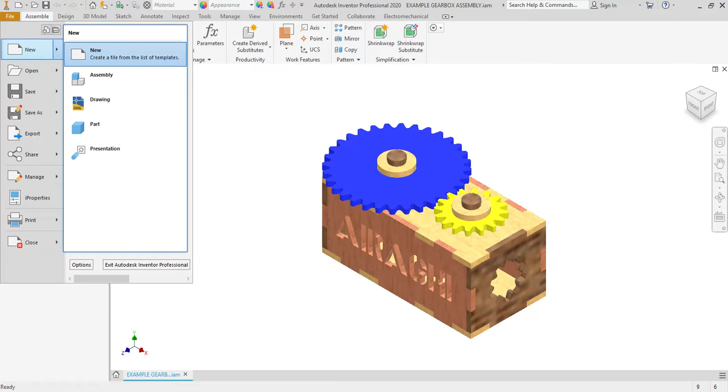So what you're going to do is come up here, go to New, and go to Drawing.

The first thing we want to do is set this to the correct sheet size. So we're right clicking on this, going down to Edit Sheet, and I'm going to change this to A size paper.

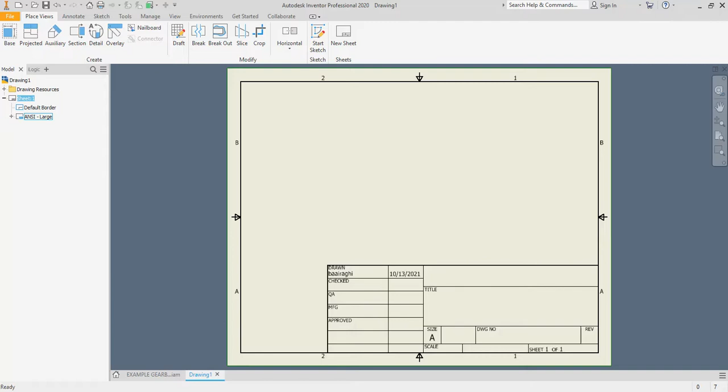Now this title block thing here, we're going to get rid of that. We're going to right click on ANSI large and delete that object.

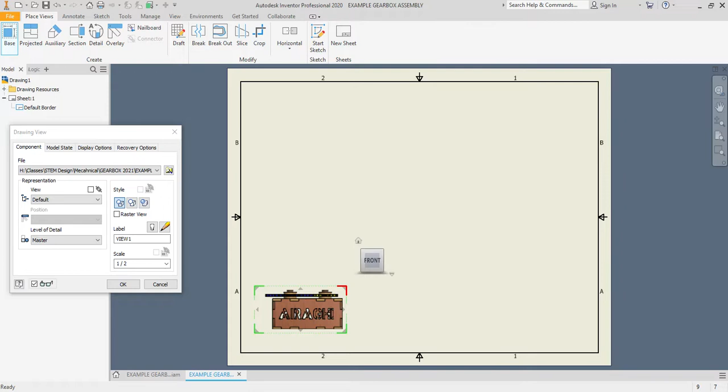So this is where we're going to put our 3-view drawing. We're going to start with our base up here, and if it doesn't show up, you need to go in and find your saved file, but it has to be a saved file for you to do this. You want this to take up as much of the paper as possible, so for me, I'm going to double the size of this.

What you do is click on the top here and the side over here, and you'll see your object. Then we're going to go up here, and this gives us an isometric drawing.

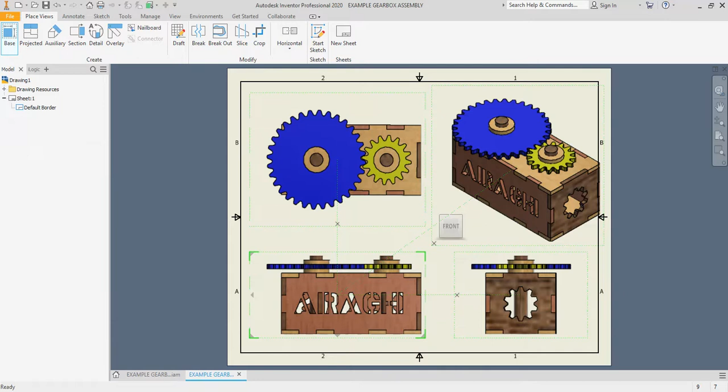So I can scoot the isometric drawing around, I can change the scale of it, I can double click and change the scale if I want. Let's say I want it like 0.9 instead of, or 0.75 for my drawing up here, something like that. You can change the scales of these so they fit better.

But what I want is for you to click on this button here, this shaded, and then hit OK, and then it looks like this.

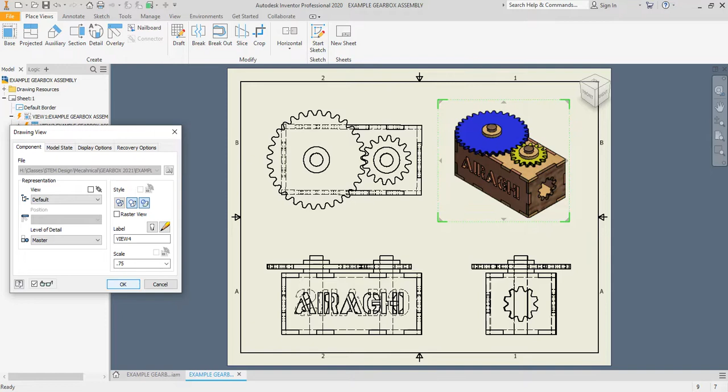So you've got hidden views here, and if you want, you can turn off the hidden lines here because this is pretty busy, and it kind of makes it look a little bit better.

I'm not really, what I'm looking for is to show the shape and the size of this so you can measure it. So we're going to go to Annotate, and we want a couple things here.

I want you to show me the distance between these, and I want you to show me the overall width of the object. Now you can't really see it here because of the gear, so I'm going to go from here to here to show you. There's my width, 4 inches, and my height here is...

I did mine 1.75 high. You can adjust your box however you want. You can see it here, 2. It might be better to do that 2 up here because it's a little bit easier to see. Since you have it 2 here, you don't need it down here.

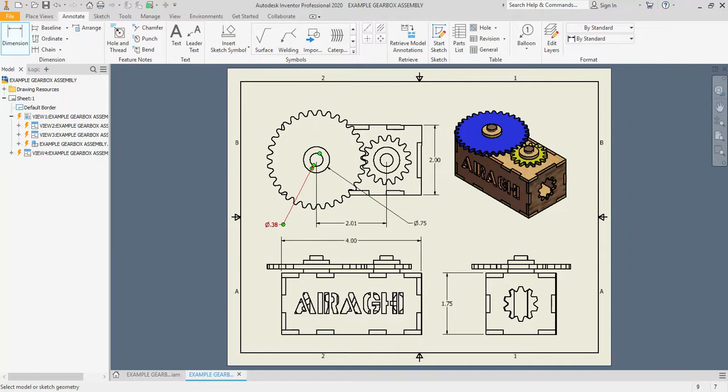As far as dimensions go, that's really all I need. Maybe a diameter here to show that this is 3/8 of an inch, and a diameter here showing that that's 0.75 inches. This actually is 0.38 because it's the actual compression ring which goes around here, and that's actually a larger diameter.

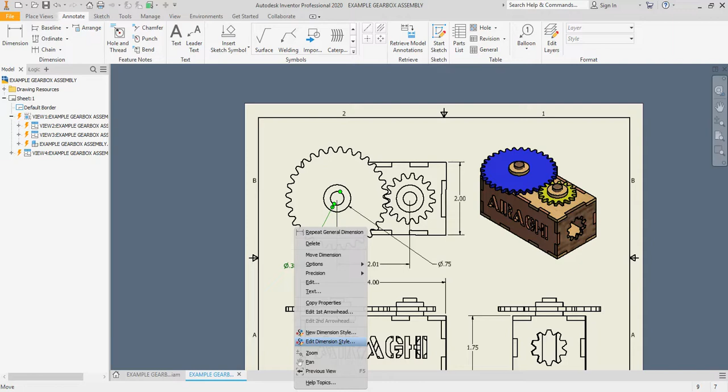This says that it cuts off the last decimal. If you want, you can go in here and go to Edit Dimension Style, and you can come in and change this. You see how it says decimal and then precision. You can change this to 3, and then this will show, say, 0.375, all that jazz.

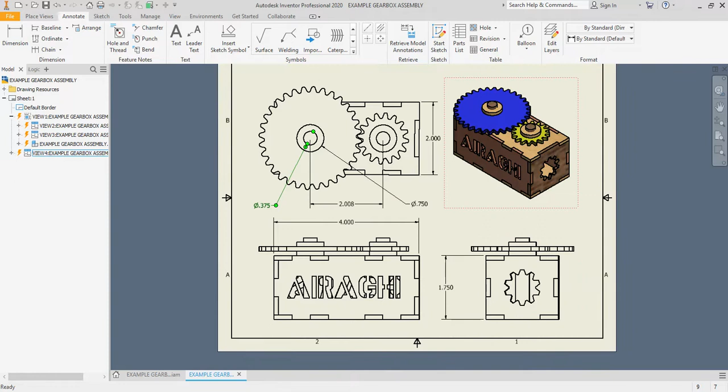So it does give you a little bit more information about the dimensions. That's all I need for that, for the dimensions.

Now what you're going to do is put your name up here. You might want to make it a little bit bigger text. You can change this to, let's say, 0.25, and we'll see what that looks like.

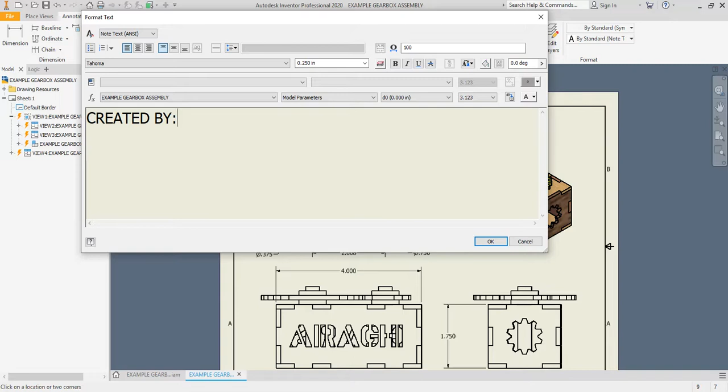I'm going to say created by Mister Airaghi. What is today's date? 10/13/2021.

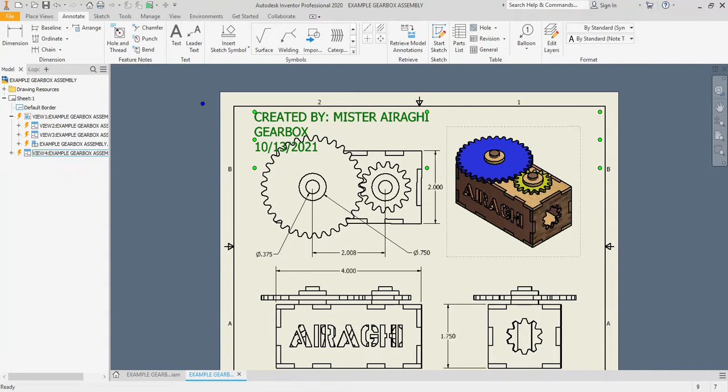And we can even call this Gearbox. And then we may need to move this so we can have something kind of like this.

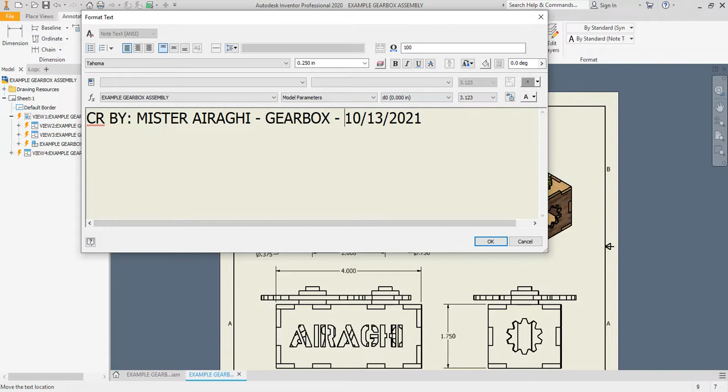And then maybe move our text. I'm going to say created by, I'll move this up here, and I'll move this up here. And there you've got your information.

Pretty cool. All right, and there's your little 3-view drawing that you can turn in.

You can go up here and go to Save Copy As, and you can change this to a JPEG, or you can change it to a PDF file, whichever one you want.

You can also print it. You can go like this and go to print, then change this to print to PDF, and then it'll print to a PDF, and you can turn in a PDF.

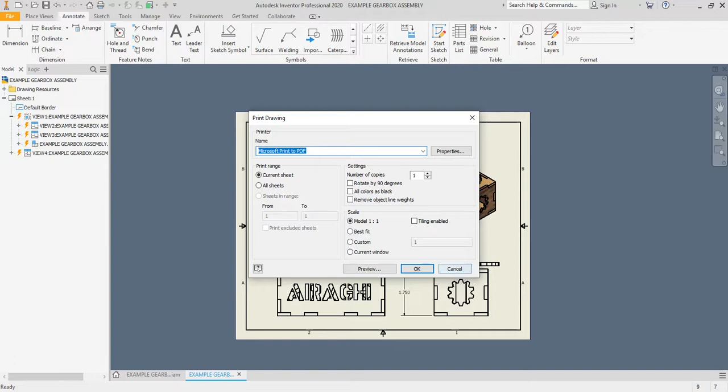Either one works. Alright, don't turn in the drawing file, make sure you turn in either an image. You could even, using Snagit, take a picture of this as well. And that's it.